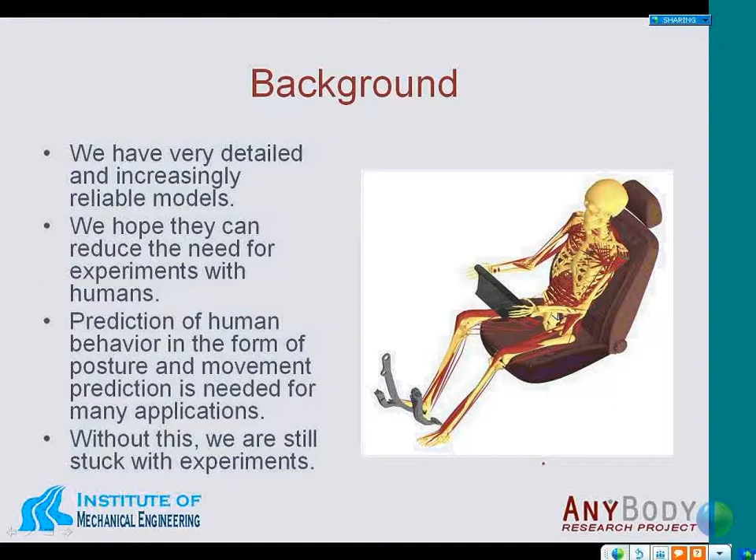Now, since we are doing inverse dynamic analysis here, we are faced with the fact that we must use as input the movement, so we must be able to predict how the human body will respond in terms of movement to a change in the environment. Otherwise, we are still stuck having to do an experiment every time we change the environment.

So those of you who know inverse dynamics, you also know that it's usually perceived as something that requires posture or movement as input, and also, in addition, all external forces. This means that the synthesis of movement is something that people who have been reading the biomechanical literature usually perceive as affiliated only with forward dynamics.

And those of you who know the literature, you also know an outstanding example by Anderson and Pandy, who have been synthesizing an entire gait cycle. Gait is a rather complicated movement, and they have been doing that with forward dynamics based on a performance criterion. Probably this is one of the reasons why people feel that forward dynamics is the only technology that can actually synthesize movement.

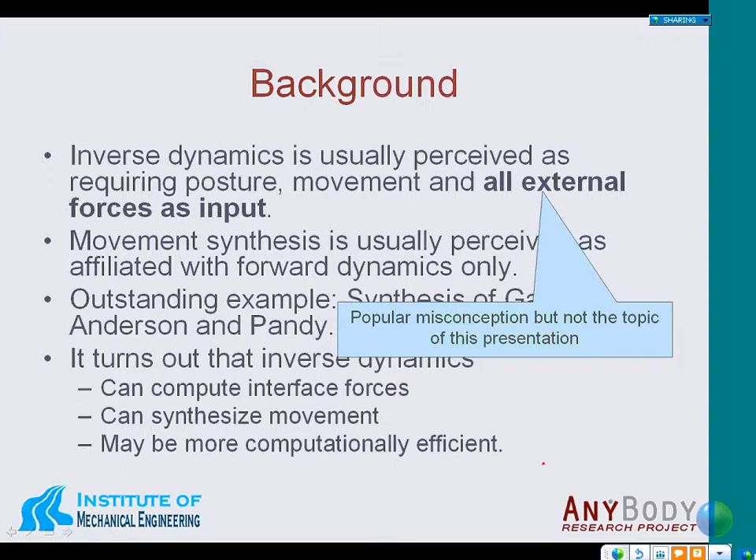But it turns out that this is not the case. It turns out that inverse dynamics can actually compute interface forces between the human body and the interface. So it is not necessary to have all external forces as input. Believing that this is necessary is a popular misconception, and we can address that at some other webcast. I'll not go into detail with that here, but it is actually not the case. Inverse dynamics can also compute the forces between the human body and the environment.

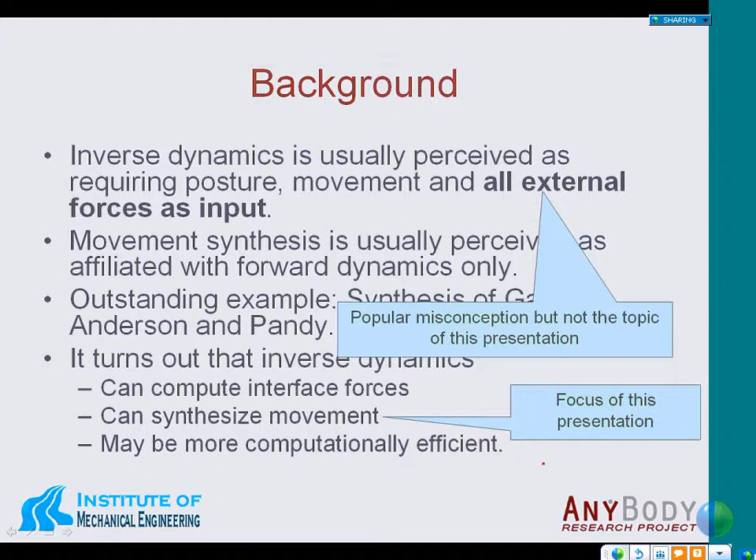It's also a popular misconception, as I said before, that inverse dynamics cannot synthesize movement, but it actually turns out that it can. This is actually the focus of this presentation. Furthermore, inverse dynamics for this purpose may be more computationally efficient than forward dynamics, and in fact in just a moment I'm going to show you an example which we can run right on the fly here as you're watching the presentation, and which will be able to predict a bicycling movement.

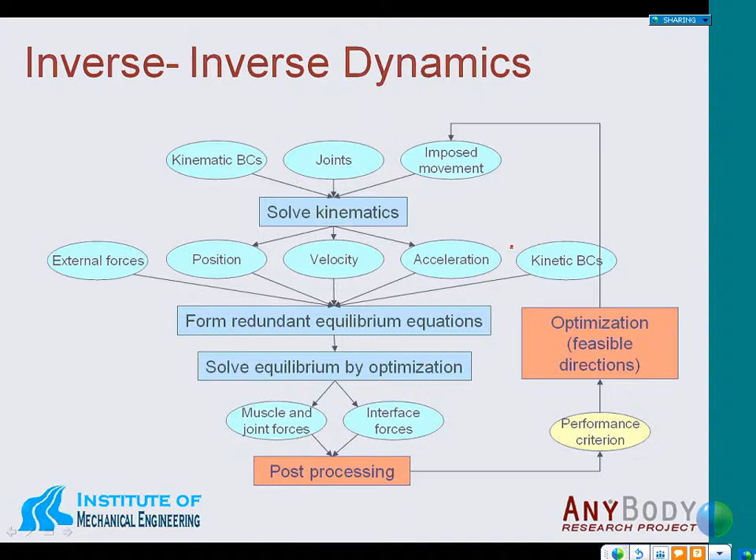And if you're interested in optimization technology, I can mention that the algorithm that we're using is a feasible directions algorithm. And there's a long explanation behind why that might be a good idea. Actually, it works very well for our kinds of problems. Now, this optimization then, based on the performance criterion, tries to come up with an improved movement. So it feeds an improved imposed movement back into the system, and we do a repeated analysis, and we come out with a new performance criterion, and then that loop continues for a number of iterations until we come to a point where we have convergence. And at that point, we will have optimized the movement or the posture of the system.

Minimization will optimize or minimize, in fact, an objective function f, which is our performance criterion. And this function f is then a function of the environment, and it's also a function of the posture or the movement of the system. And in the present case, we are only changing the environment, and then we are keeping the posture or movement the same, independent of what the environment looks like. Now, another way of formulating it would be to do a posture or movement optimization. In this case, we optimize the posture or the movement, and then we keep the environment fixed.

So that would be the other extreme. We're not changing the environment, but we're just trying to figure out how the human body is performing in this given environment by optimizing the posture or movement.

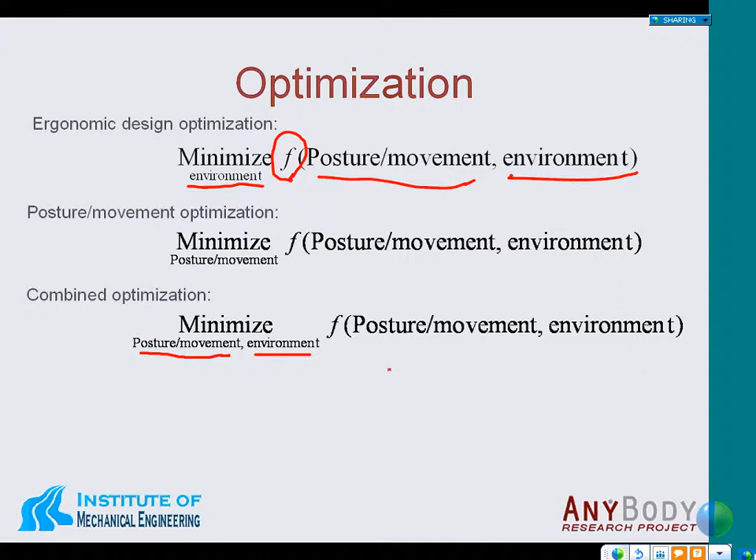And then finally, we can think of a combined optimization problem, which is really what we want to do. And the combined optimization problem is one in which we optimize the posture and the movement along with the environment, so that when the environment changes, we also allow for the optimizer to change the posture or the movement such that it fits the environment as well as possible. And this would really be the kind of problem that we are looking to do.

Please notice here that we have the posture and the movement separate, and also up here in the list of variables we have them separate, but we are using the same optimization function, the same objective function for the posture and the movement and the environment. So it's necessary here to make the assumption that it is the same performance criterion that would give us a good environment and also would govern the way that people would be moving in that environment.

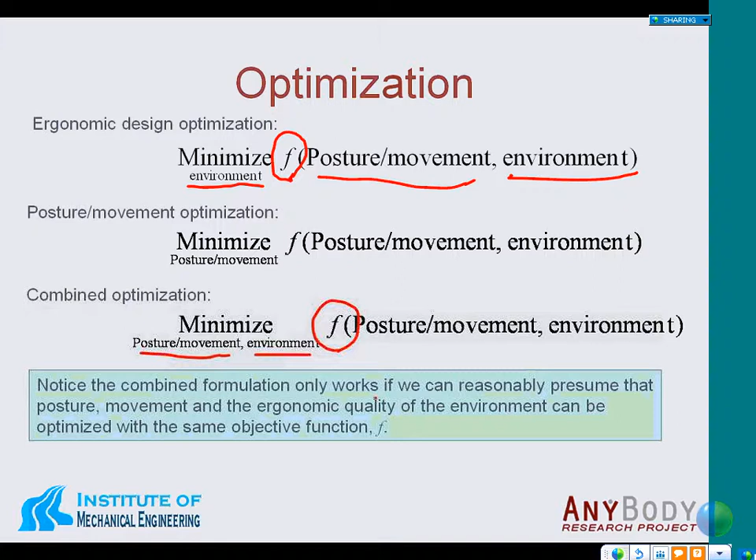That is a rather strict requirement on this type of problems, and it is really necessary to come up with such a function in order to do the optimization. So this combined formulation will only work if we can find a reasonable objective function that will work for both of those classes of design variables.

We have some results that we have published actually several years ago. The first one I'll show you here is a 2D model of a squat jump that we did back in 1999 for the European Society of Biomechanics conference in Dublin. And it's a very simple model. We have just 9 muscles in each leg, and the movement prediction is to do a squat jump. So it's really easy to say that the objective function of this would be the height of the jump. So we simply want to jump as high as possible.

Again, I will go very quickly over the definition of Hermite polynomials, but it's a special type of orthogonal polynomials which will ensure that each new term you add to the polynomial will give you something that you do not have in any of the other terms. And when we then use the coefficients of the terms in the polynomial as design variables, it will mean that each design variable adds something unique to the function, and that is a nice quality to have in an optimization problem. So the objective function here is, as I said, to maximize the jump height.

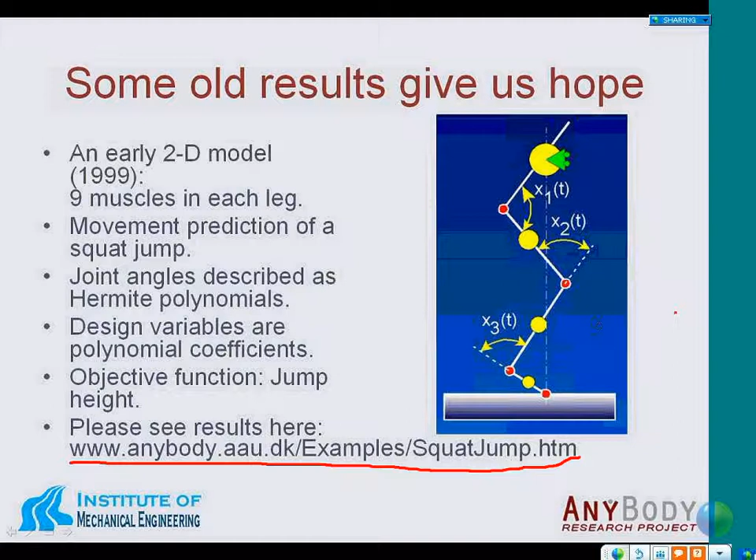And I really wish that I could show you the results, which is an animation. Unfortunately, the webcast technology does not allow me to do that. But if you look here at the bottom of the screen, you can see that I have written a web address. And if you're able to have a browser window next to the webcast, then you can open that up and go to this URL address that I have shown here. And then you will see an animation of the squat jump before and after the optimization.

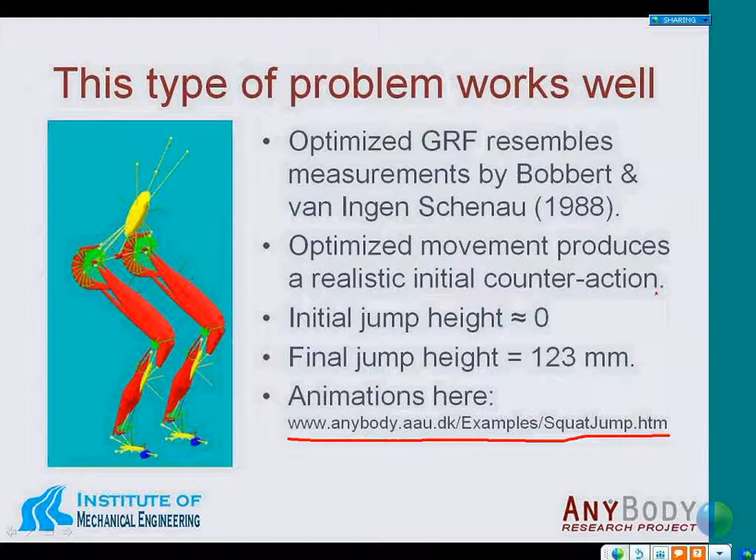The initial jump height of the proposed initial motion is very, very low, a fraction of a millimeter, I think. And the final jump height is 123 millimeters. So obviously it's a big improvement, but it's not a very impressive jump. And I'm sure that if we used a more complicated leg model, then we would be able to make it jump higher.

The second example that we have done before is a pedaling example. The model that you can see here on the right-hand side is a simple 2D bicycle model. It is equipped with the same muscles actually as the squat jump model. So it has 9 muscles in each leg. So it's a pretty simple model, but we know from comparison with experiments that it captures the physiology and the muscle recruitments of a bicycling process fairly well.

Making some assumptions in this bicycle model: we are presuming that there's a constant crank velocity. We're presuming that the pelvis is fixed to the saddle as opposed to having an upper body on the model that would attach to the handlebar. And we are constraining the mechanical output so that the model has to deliver a certain amount of watts on average on the crank. Then we're using as variables the crank torque profile and the ankle angle variation.

That was what we did in the publication about this, which I will refer to in just a moment, and which you can find on the AnyBody Research Project's homepage in the publication list. However, in the example that I'm going to show you now, I would like that to run very quickly, so I have restricted myself to just look at ankle angle variation. So let's try to do a simple demo of this.

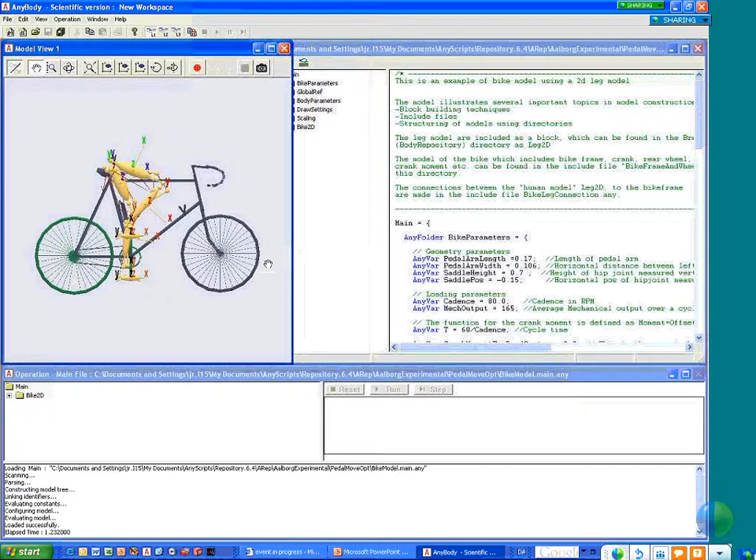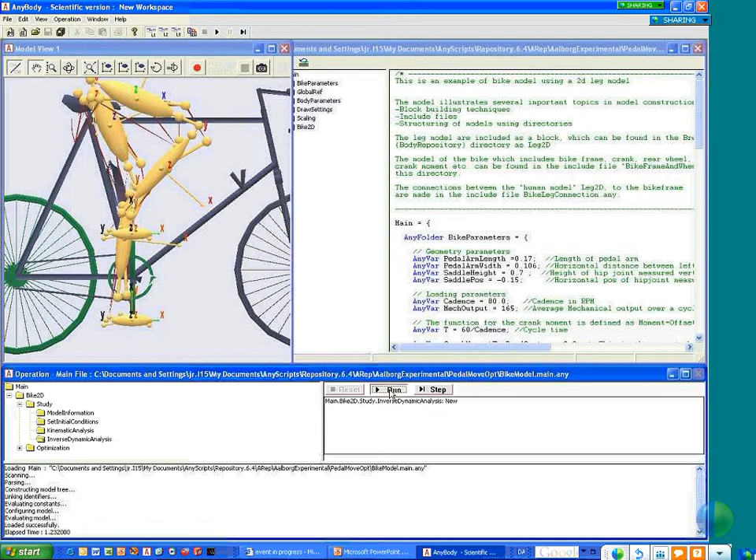And what I'm doing here is I'm opening up the AnyBody Modeling System, and I'm going to single step through one analysis of this model. And I'd like to ask you to pay attention to the variation of the ankle angle as the model is moving. Oops, that was the wrong button. I was supposed to single step through the movement. I will do that now.

You can see now the pedals are moving in small steps, and you can see that the muscles are bulging as they are being activated by the system. You can see that on the leg that's going down here, you can see a lot of quadriceps activity for extending the knee. But please notice the ankle angle. The ankle angle is being kept constant in this bicycling process. I'm just going to do a few more steps.

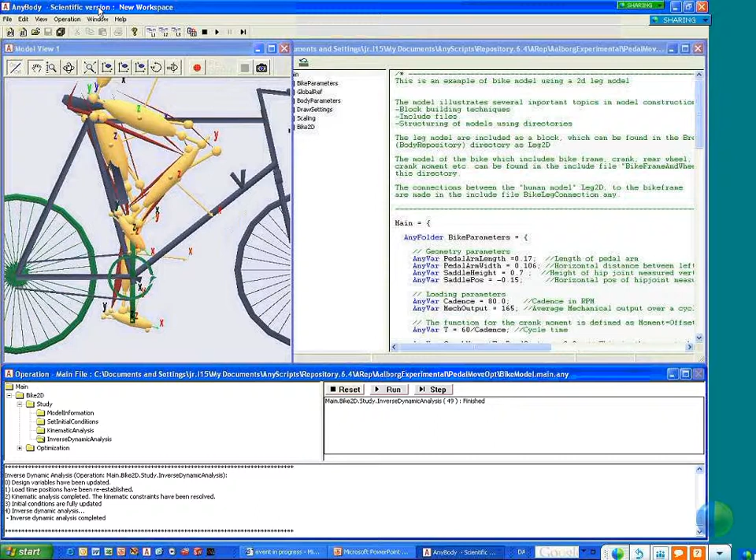And you can see now the right leg is changing from the downhill stroke to the uphill stroke, and you will also see the muscle activation pattern is changing from the forward side to the posterior side. And so that was the entire analysis. I'm then going to open up a window in which we can look at the results of this analysis.

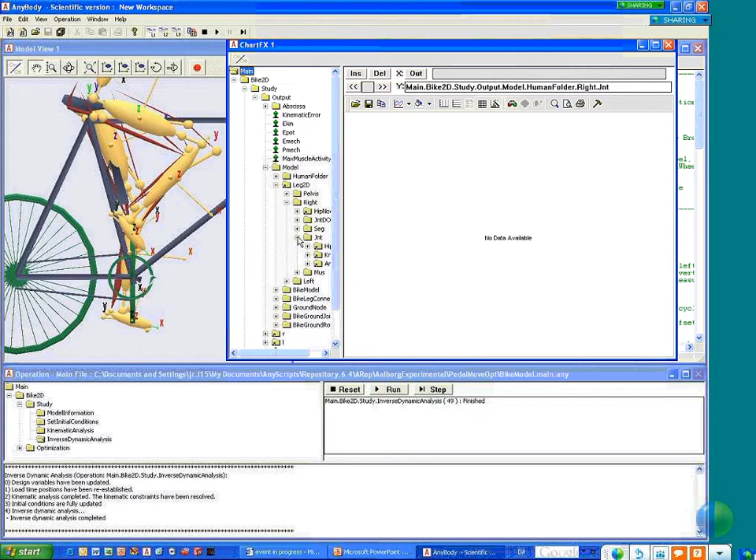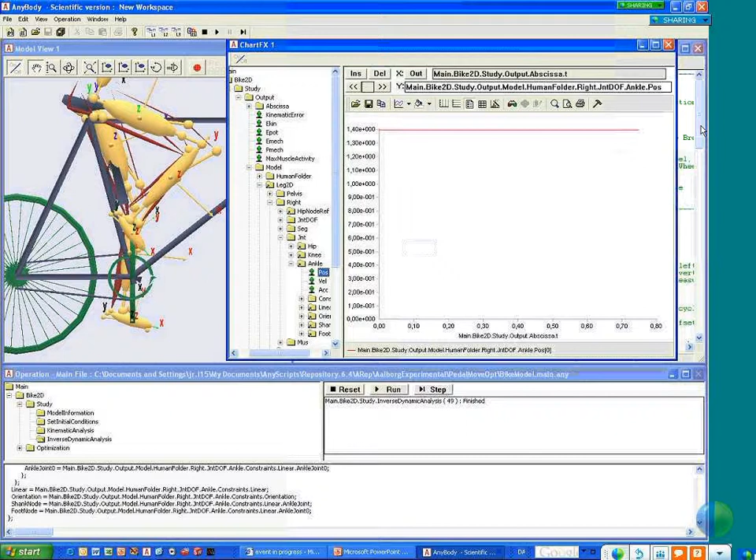The first piece of result that I'm bringing out is the ankle angle. As you can see, it is completely constant. And the reason why the ankle angle is completely constant is that inside the definition of the model, I have specified that the ankle angle should have no variation. Where this is defined in the model is in this section, the bike parameters at the top of the model.

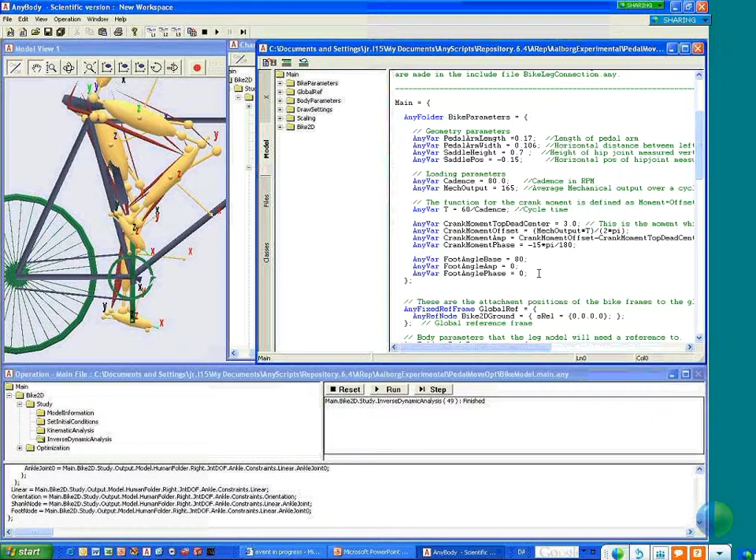And just to introduce what this is to you, this is not C++ or JavaScript or something like that, although it looks like it. This is the AnyScript language which we're using to make the biomechanical models in the AnyBody Modeling System. And you can see here that the foot angle amplitude and the foot angle phase shift are both 0 in this initial configuration. And what this translates to in the model is that it keeps the ankle angle constant.

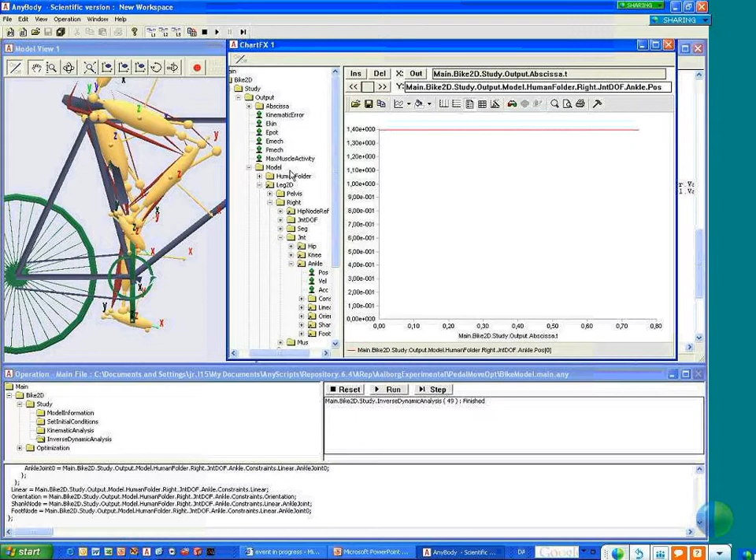If I go down a little bit into my definition of the file here, we come to a section called the study. Inside the study are defined operations that we do to the model. And I want to draw your attention to one particular thing, which is this output function, which is called maxAct. And it has a value which is equal to the maximum muscle activity. Go back to the chart view where we can make graphs. Then I will be able to find this property in the study.

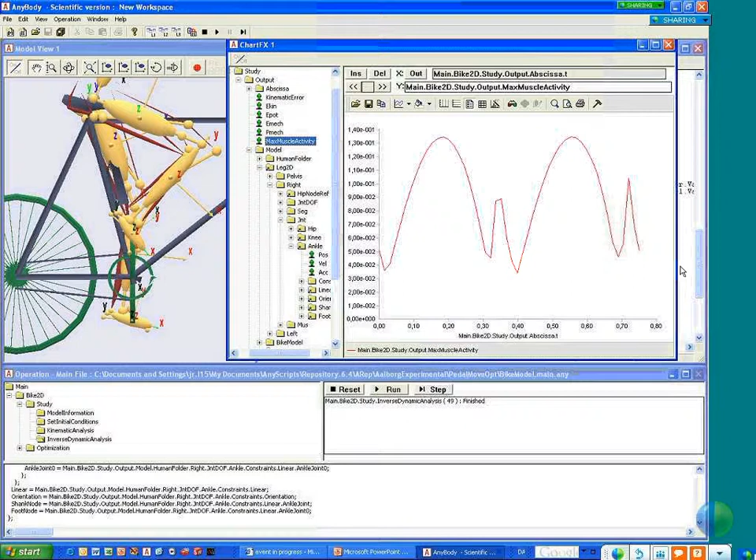Here you see the maximum muscle activity, and you can see how that varies over the cycle, and you can see a very characteristic peak here in between the two major peaks, and this peak is coming at the point of the dead center of the pedaling movement. And actually this peak is not something that you usually find in experiments. If you take EMG of the muscle activities, you will usually not find this peak. And the reason why we have this peak here is that we have specified that the bicycling process should be done with an unnatural kinematics, namely with this constant angle.

So what we're going to do in the model is specify an optimization problem, and that takes place a little bit further down. So in the section that you see on the screen now, you can see that we have specified an optimization problem in which we have two design variables. The first variable is the amplitude, and this is linked to the parameter that we saw at the beginning of the model, the foot angle amp. We also have the phase shift, which is linked to the foot angle phase that we also saw in the beginning of the file. And then finally down here we have defined what we call a design measure. This is actually the objective function of the optimization.

So we've said that what we want to minimize is the maximum of the maximum activity over all the muscles. The maximum activity over all the muscles is really the envelope of the muscle active states, so it is the highest activated muscle at any point in time in the cycle. If we can lower the maximum of the maximum activity, then we will have enabled riding the bicycle with a lower effort than we have at the present time.

So we are basically making the assumption that when the bicycle rider is choosing his or her movement of the ankle angle, he is essentially trying to make life easy for himself, meaning that he's controlling his ankle angles in such a way that he minimizes the effort of driving the crank around at the speed and crank torque that we have specified.

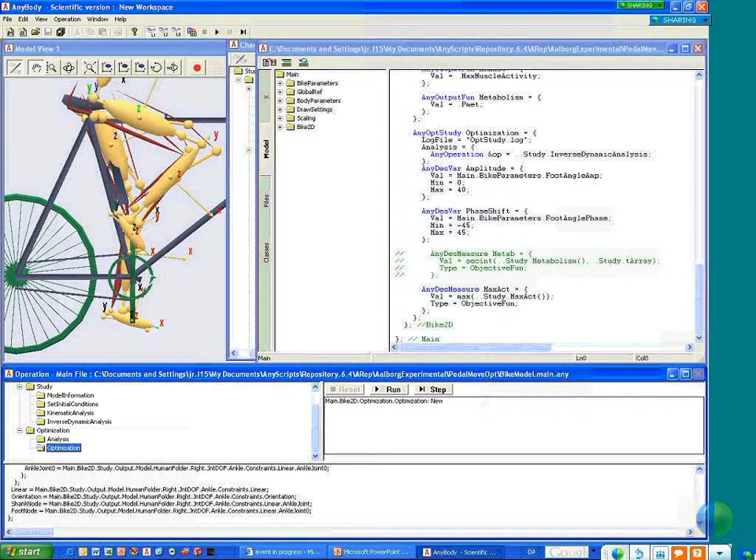To run the optimization, I can go down here in my study tree, the optimization, and I can click run. And if I did that, the bicycle would start pedaling like crazy, and you would see that the ankle angles would change gradually. Unfortunately, we cannot do that over the webcast because it generates much too much graphics to be transmitted over the internet. So I have to switch the graphics off as we run the optimization. So now the graphics is switched off, and I click the run button.

There's a number here where I have my cursor, which is counting up from 0 to 1 to 2. And every time that number increases, it's because the analysis has taken another iteration, and it has to count up to 6 or 7 or so, and then we will have convergence, and the system will have identified a different movement of the pedals from what we had before. And we will go back and have a look at what that looks like.

So I think it's just about finished now. In just a few seconds, it will have counted to 6 here on my screen. Or maybe 7, I'm not quite sure how far it has to go. Now it's finished. And we can go back to the analysis again. Dynamic analysis, switching on the graphics once again. And then I will single step through the movement and try to pay attention now to the ankle angle variation.

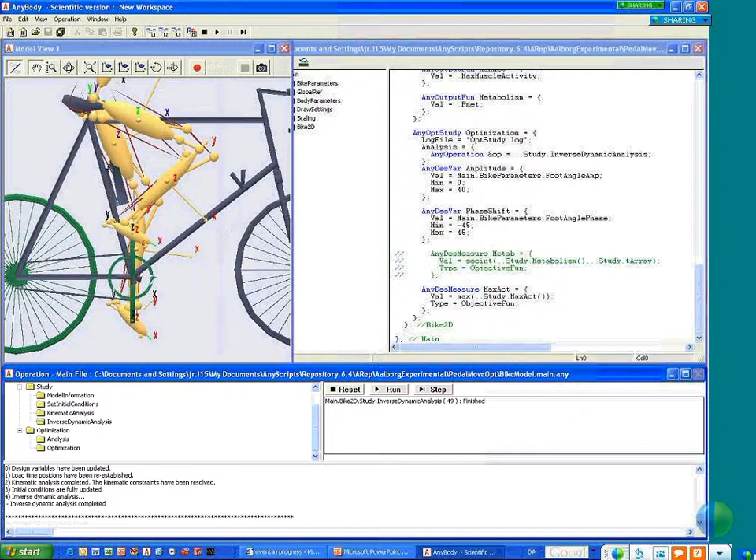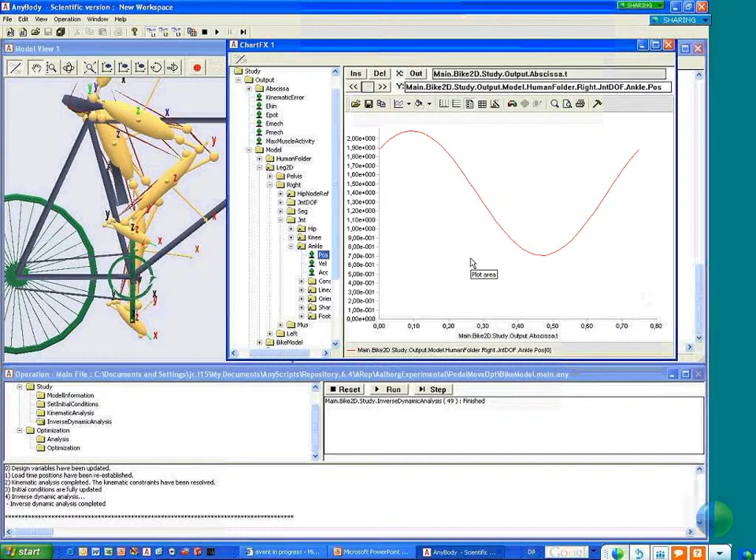And here we have finished the analysis, and I'll try to call up the window with the graphs again. And you can see here the maximum muscle activity. We no longer have that little peak around the top and bottom dead centers. And if we want to study in detail how the ankle is moving, we can do that as well. You can see here that the ankle is now moving as a nice sine function. So the optimization has caused the initially constant angle to attain a certain sinus-shaped variation.

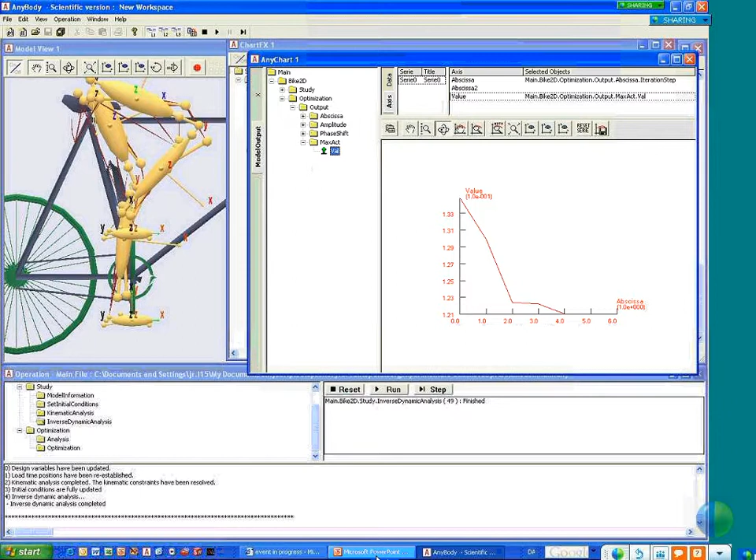I'll just open up another window here to examine the convergence of the optimization problem. And so in this window you can see how the maximum muscle activity has been decreased by the optimization from 1.35 or so down to 1.21. So this is a considerable reduction of the maximum muscle activity and thereby a reduction of the effort of the bicycling process by means of doing this optimization.

So you can see that we can actually reproduce the real ankle movement very nicely by this optimization. And you can also see that the numerical efficiency of this is actually quite high. It doesn't take a lot of time to do that.

Furthermore, I have not demonstrated that here, but we have done experiments with these models. And it turns out that it is very important to choose the right objective function, of course, but several different objective functions which could be deemed reasonable for a problem like this will actually produce the same results and pretty much the same ankle variation.

So whether we use maximum efficiency or minimum fatigue or minimum effort as we use now, or we use an optimization problem formulated as minimum muscle trauma, where we compute the muscle trauma as a damage accumulation function, we will in all cases come up with the same results with an ankle angle variation that resembles quite closely what a real bicycle rider is doing.

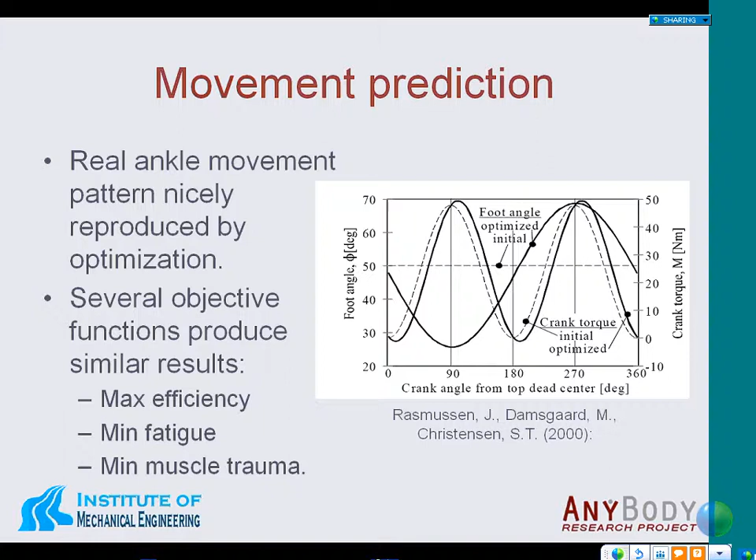So perhaps there is some hope in this method, in the sense that you do need to pick the objective function reasonably, but if you do pick it reasonably, then maybe it's not so important precisely which objective function it is.

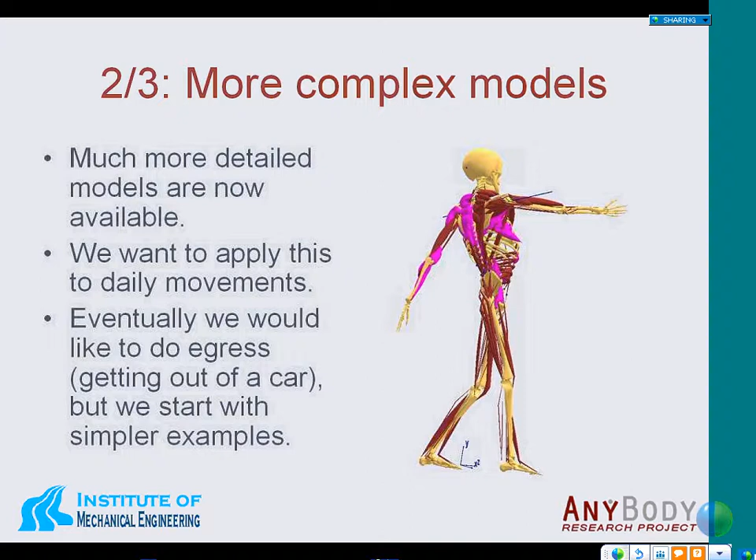Now, the second part of this presentation is about the more complex models that we have available now, because the examples that I've shown you so far are with very simple models. We now have much more detailed models available, as you can see in the picture here. And obviously, we would want to apply this optimization to some sort of daily movement.

And we have this dream of eventually being able to do egress out of a vehicle. But we're starting with some simpler examples on these rather complicated models. And the first example that we will look at is the standing posture prediction. So this is just an example of quiet standing on two legs.

And we're trying to figure out how the body would move about its different segments and adjust its joint angles so that we stand with a minimum effort. Our initial guess of the standing posture is one which is symmetrical, and also we have specified that the model should remain symmetrical. And then we have also specified that the center of gravity of the model should be positioned exactly vertically above the ankle joints.

The reason why we have picked that is that if we do that, then of course we reduce the torque about the ankle joints to zero. And in some sense, if you want to minimize the muscle effort, that might be a good idea to do.

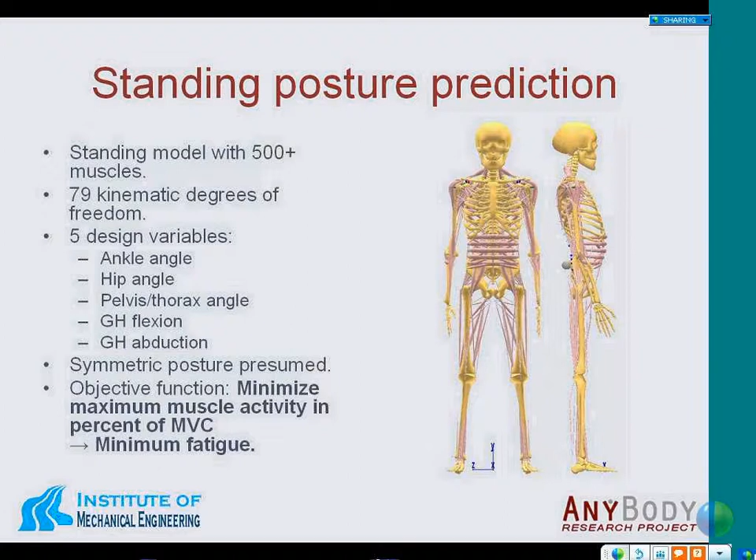And then we use as design variables here the ankle angle, the hip angle, the angle between the pelvis and the thorax, the glenohumeral flexion and the glenohumeral abduction, as postural design variables. And again, we use the same objective function as before. We are minimizing the maximum muscle activity in percentage of maximum voluntary contraction, and this translates to a minimum fatigue optimization. So what are the differences then?

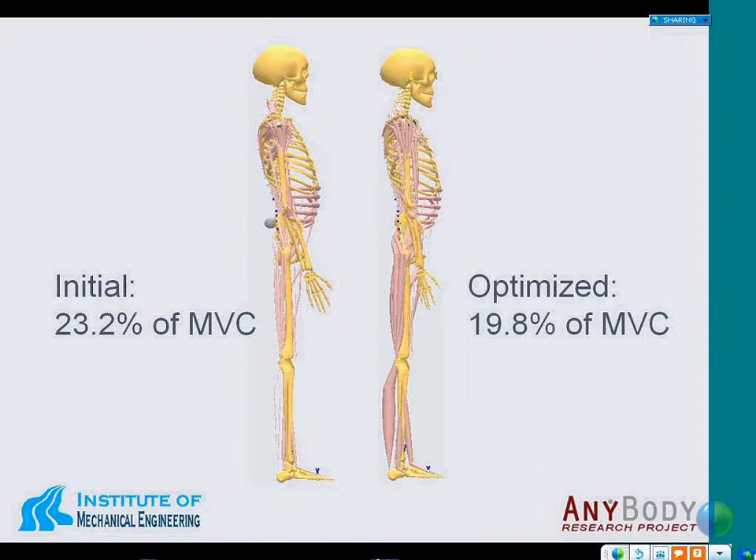And it turns out that by leaning a little bit forward like that, it's possible for the body or the model to save a little bit of the effort that it has to use in order to keep its upper body upright. And so finally, it turns out that this can reduce the percentage of maximum voluntary contraction a little bit. And it is actually also consistent with what we find in experiments, that the center of pressure is not right below the ankle joint, but actually a little bit forward compared to that.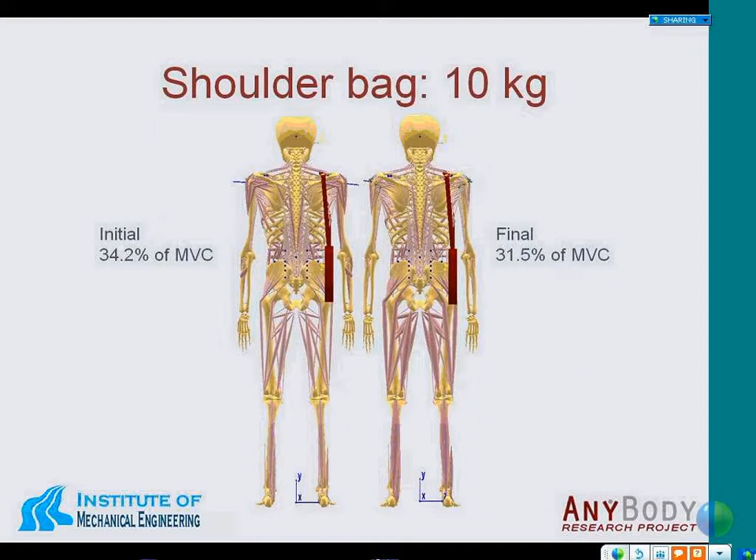Actually, this one is also leaning a little bit to the left-hand side. Of course, this is leaning against the weight of the bag. It's just very difficult to see in this picture because the bag is not heavy enough. So if we increase the load of the bag to 30 kilograms, it becomes more obvious what's happening. Here you see the results for a bag of 30 kilograms.

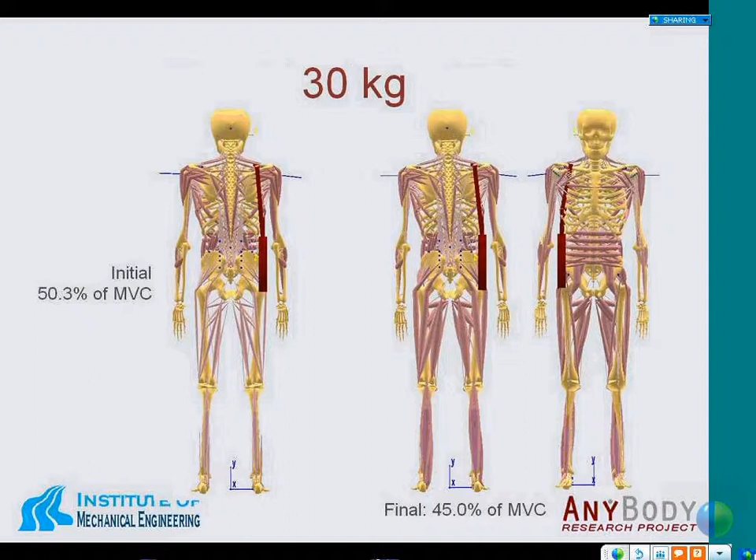The initial posture on the left-hand side, we're now using 50% of our strength to carry the bag. And on the right-hand side, you can see that this can be reduced to 45% of our strength if we are leaning a little bit against the load of the bag, so that if we have the bag on the right-hand side, then we are leaning a little bit to the left in order to compensate the weight of the bag. This all seems very intuitive to me, and it looks like a reasonable result. But I have to admit that we have not validated this experimentally.

Now, the final part of the presentation is, of course, the conclusions. Just to sum it up very quickly, I would say that it seems that the method is working if we know what the criterion is. And that was the case in the squat jump example, where it was very clear that the criterion would be to maximize the jump height. We've also seen in the pedaling example that we can get similar results by using several different reasonable criteria, so it looks like maybe there's some flexibility in the way you define your optimization problems, as long as the criteria that you're using make some amount of sense from the point of view of physiology.

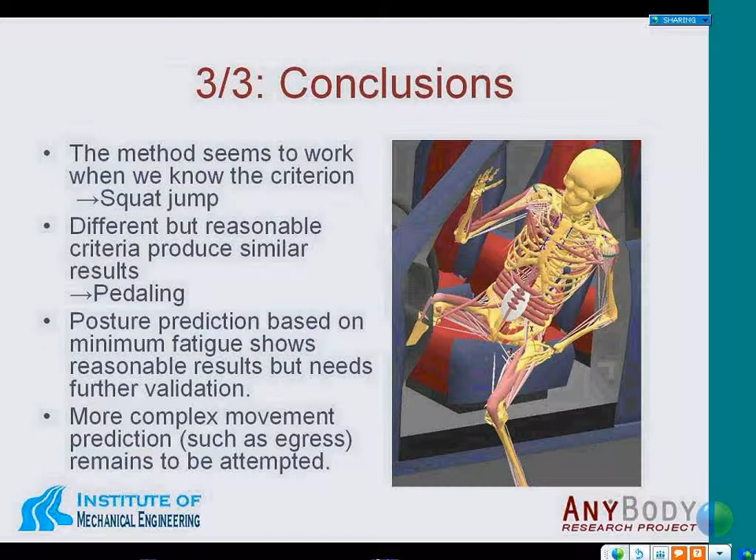Then we've been doing some posture prediction based on minimum fatigue with the shoulder bag and standing model, and we are getting reasonable results from that, but we still, of course, need to do further validation of that. We are establishing cooperation with some of our scientific friends who are doing extensive experimental investigations of models like these, and we're going to try to hook up our models with their experimental results. Hopefully we can get some clarity out of that. We are also very eager to try more complex movement predictions such as egress, and we will do that sometime in the future.